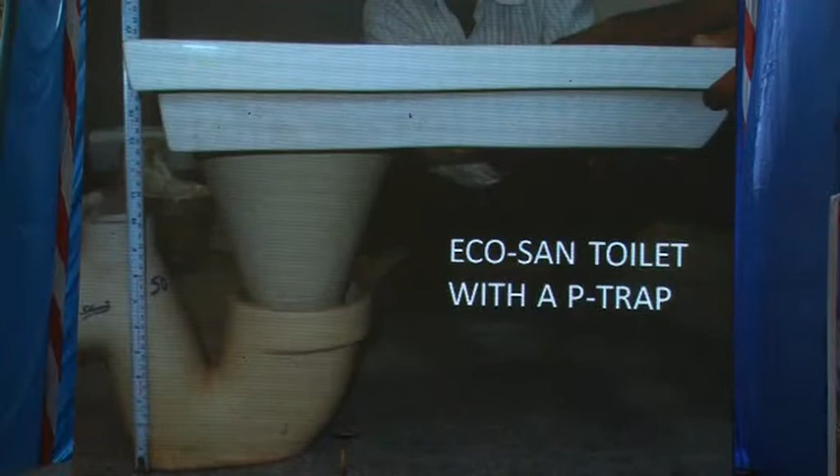And I read some of the drawings, there was no grease trap in the Pathik ashram. Okay, I'll just go. Now, I just want to tell you what is EcoSan. You can see the P trap. This is EcoSan. The front opening on the left, this is a urine orifice, this is a fecal passage. And you can see both the pipelines laid separately.

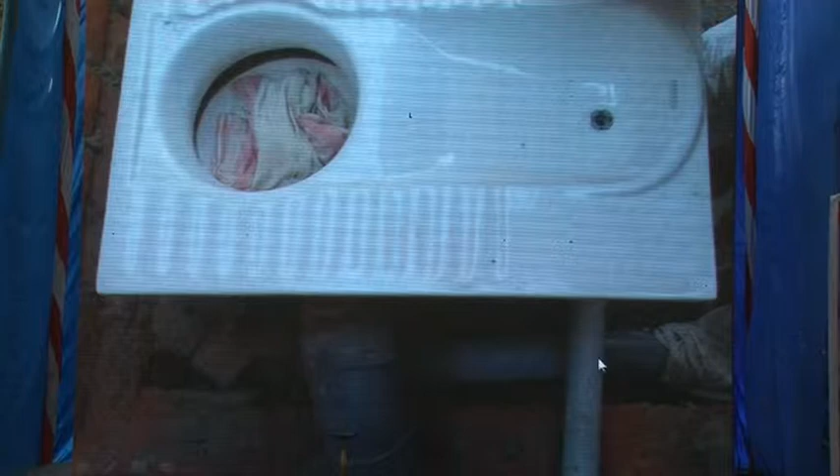Additional 5 lakhs, suppose, giving you benefits for next 35-40 years. Anyway, honestly, I'm really thankful because I don't know how to cover up all the areas. But

if you leave the excreta to the soil, you gain in energy. And if you leave it into the water, you call for advanced aeration system. And advanced aeration means not only NO2, NO3, it will produce N2O, nitrous oxide, which is 314 times more potential as a greenhouse gas.

Forget about methane, forget about carbon dioxide. Carbon dioxide is a peanut, forget about that. Your nuclear power plant, your hydro power plant will not give you CO2, and therefore no forest, and therefore no food for 10 billion. What are we proposing? Give me more carbon dioxide. I'll give you more food and we will grow plants in a manner.

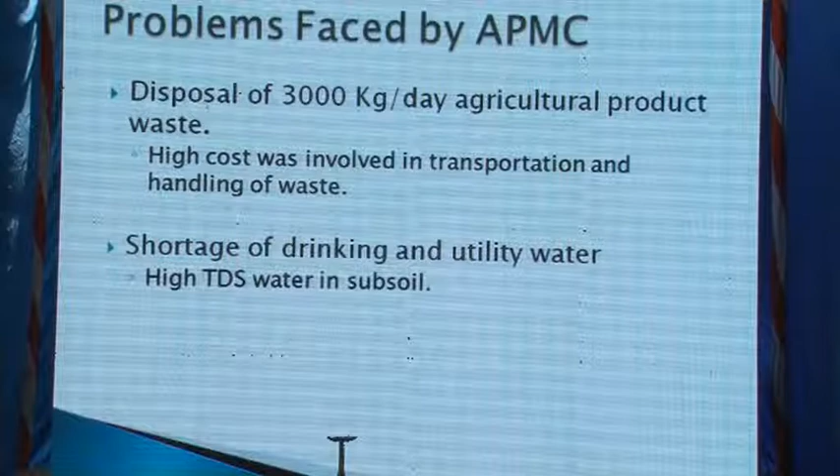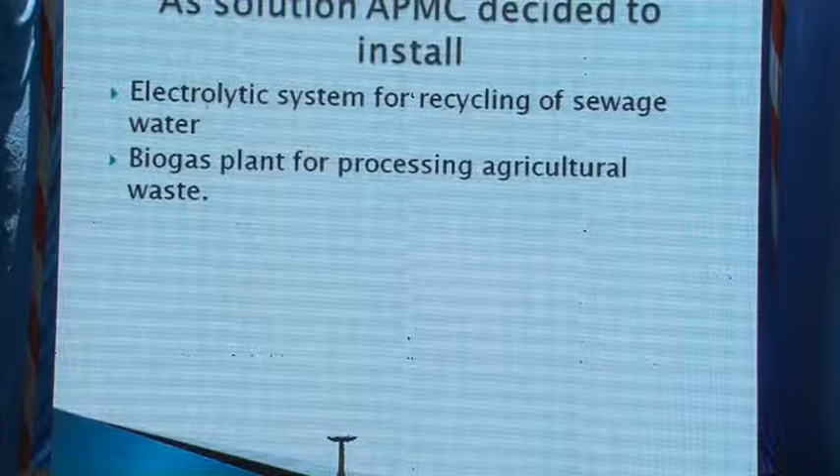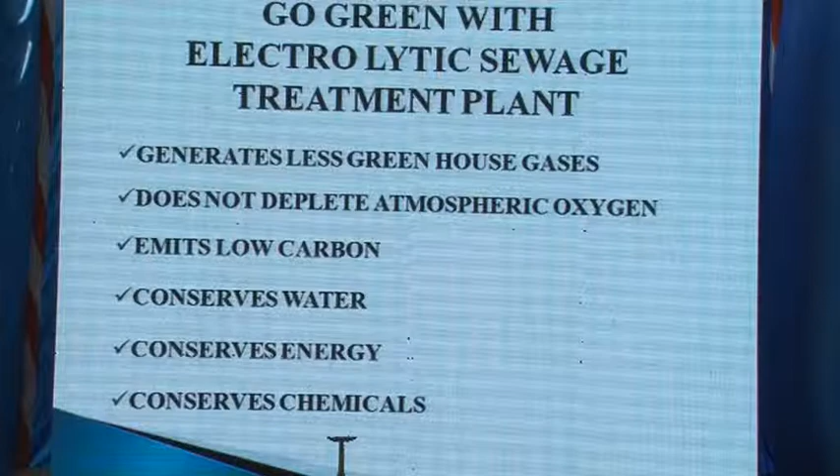As a solution, APMC decided to install an electrolytic system for recycling of sewage water and nearby a biogas plant for processing agriculture waste. Now, what is the electrolytic process? Go green with an electrolytic sewage treatment plant. First of all, it generates less greenhouse gases and does not deplete atmospheric oxygen. It emits low carbon, conserves water, conserves energy and conserves chemicals.

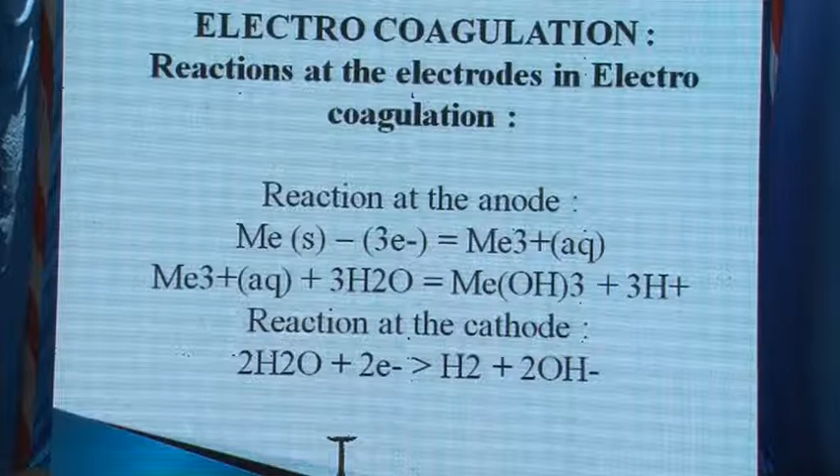The electrolytic process of sewage water treatment is totally chemical free and non-biological. It basically involves the passage of electricity through water. Electric current destabilizes dissolved and colloidal particles and alters the charge on suspended matter, permitting electrocoagulation, agglomeration, electroflotation and then removal. This is a mathematical calculation of how the electron transfer takes place. This is for the electrocoagulation calculation.

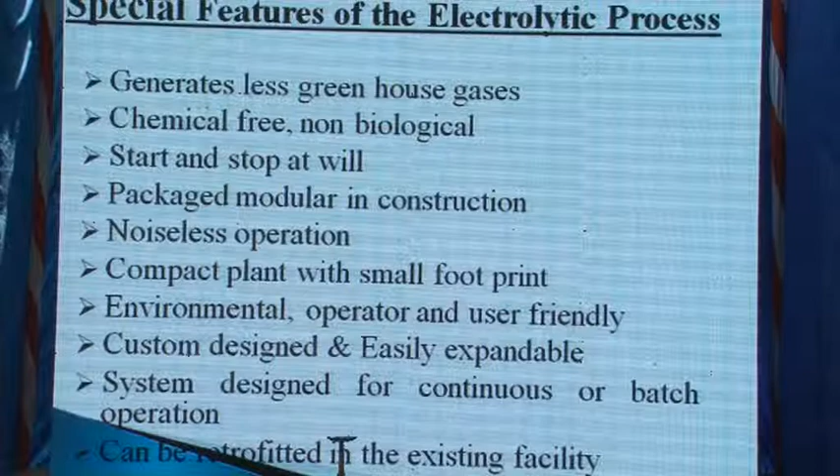Now, special features of the electrolytic process: it generates less greenhouse gases, is chemical free, non-biological. Again, it starts and stops at will. Whenever you want to start the plant, you can start. Whenever you want to stop the plant, you can stop. It's a very easy operating system. Package modular in construction also, and it's noiseless operation, no noise at all. It's a compact plant, environmental, operator and user friendly. It can be custom designed, easily expandable, system designed for continuous or batch operation also.

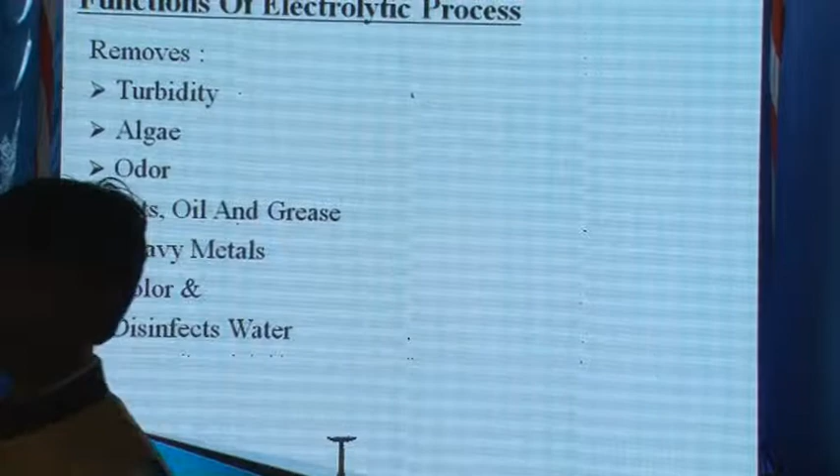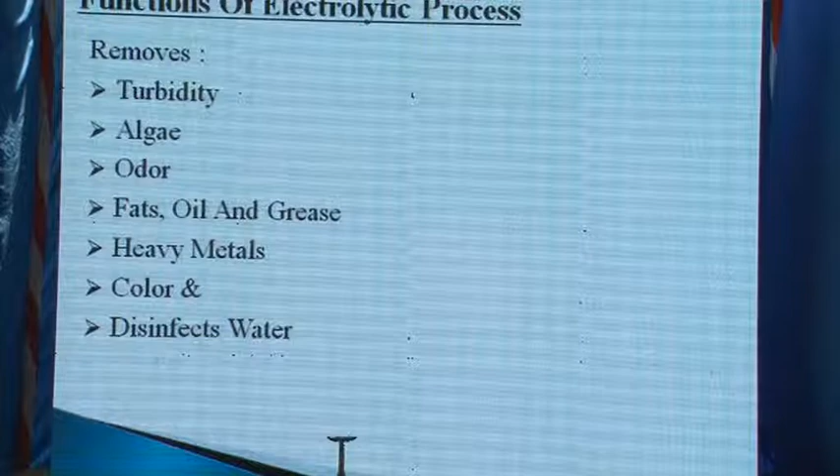How does it function? It removes turbidity from water, algae, odor, fats, oil and grease, heavy metals, color and disinfects water. Applications of this technology could be for raw water from sewage, used water from swimming pools, sewage water, cooling towers, effluent also.

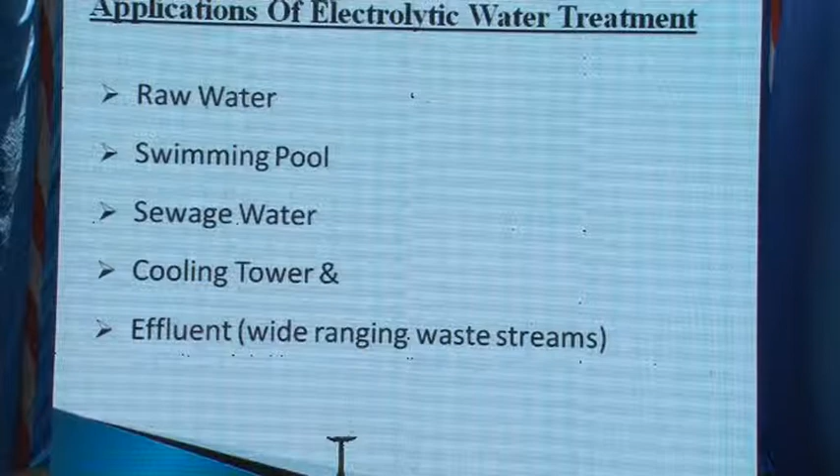Now advantages of this technology: no aeration, no blowers, no diffuser, no noise, no chemicals, no need to maintain MLSS, pH, temperature. Does not deplete oxygen, environment friendly, operator friendly, no skill required, accelerated startup, start and stop at will, modular construction, compact, small footprint.

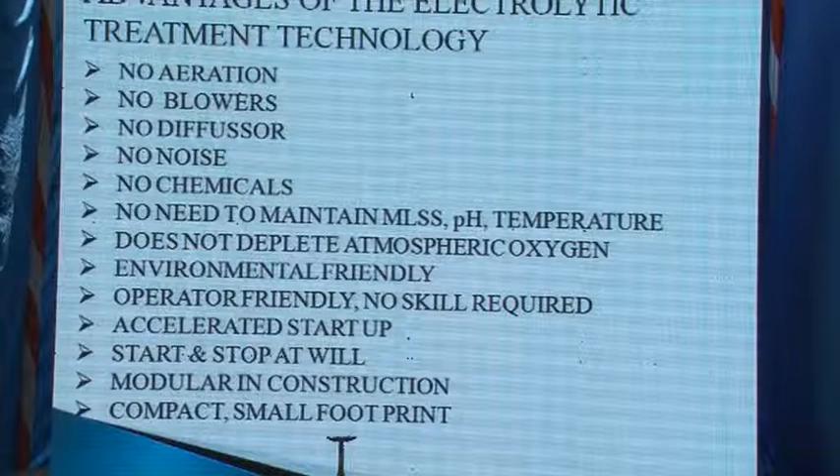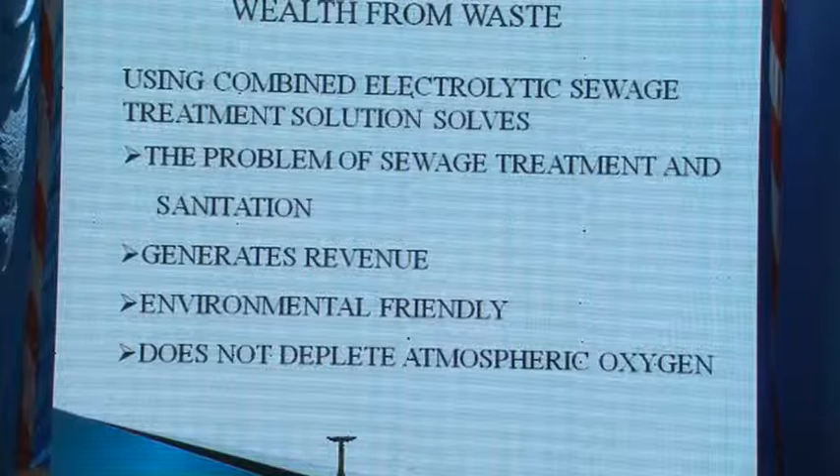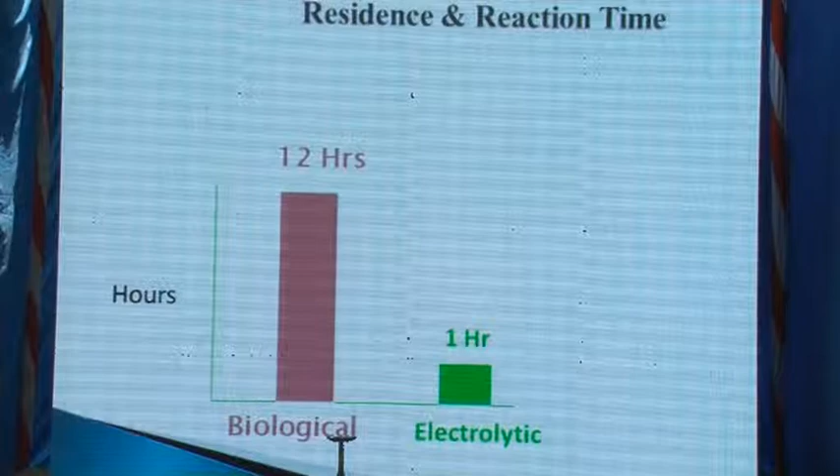Now this is the difference. In the biological process, it will take minimum 12 hours to activate. In the electrolytic process, within 1 hour you will get the result. For the final product in the biological process, it may take 1 month. The electrolytic process will get the result within 1 hour.

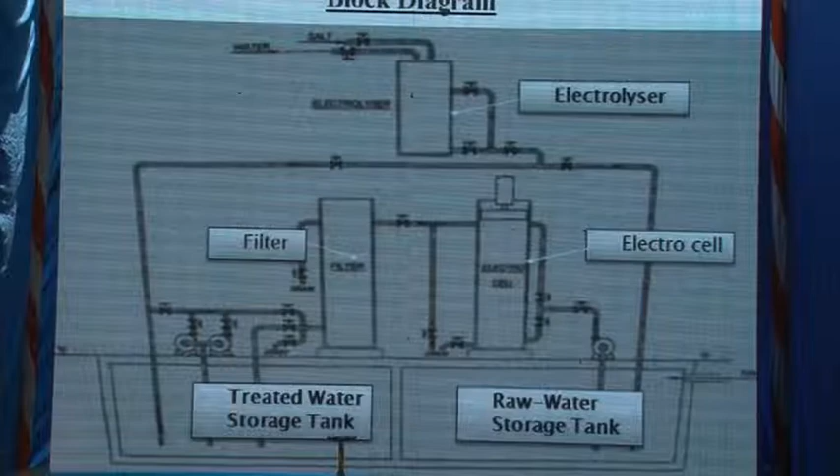This is a block diagram. First a raw water storage tank, then electro cell, electrolyzer, filter, and then treated water storage.

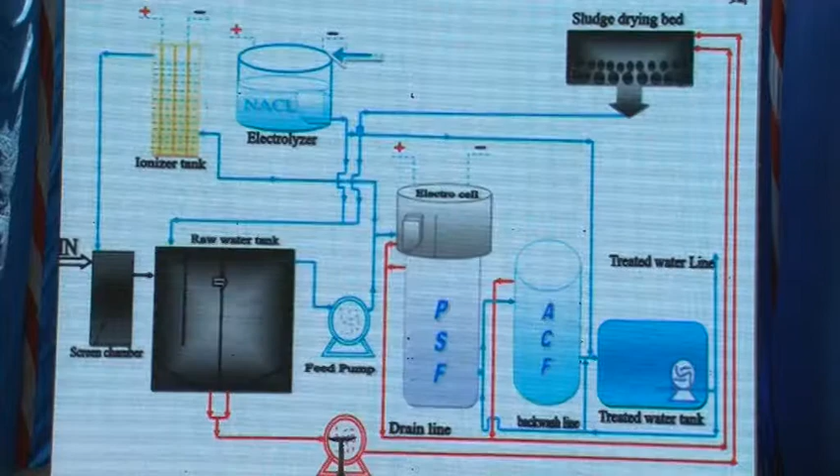Now, coming to the particular case study of APMC Vadodara, which we have already worked on and it has been running for the last 3 years. We have installed a plant capacity for this electrolytic water process of 75 KL per day, 75,000 liters per day. It's the total capacity of the plant. Of course, right now we are running at 30,000 liters per day.

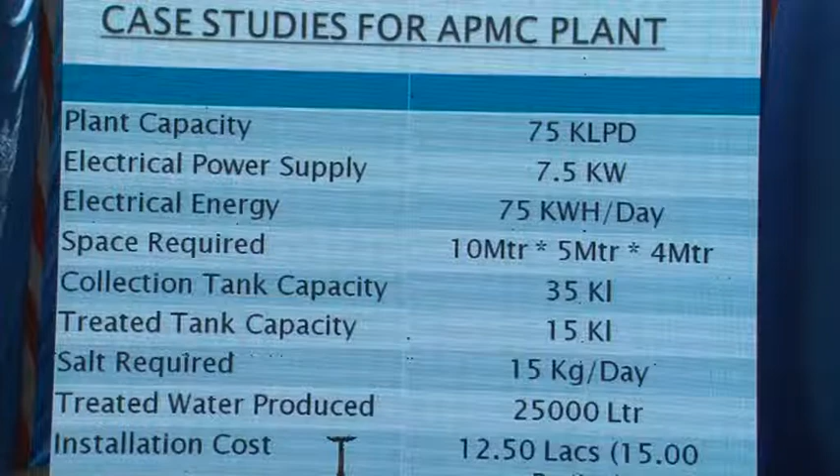Now the operating cost for 1,000 liters. Electric consumption at the cost of 5.5 rupees is only 3.85. And we are not getting any electricity from outside, from GEB. That I will show you later on.

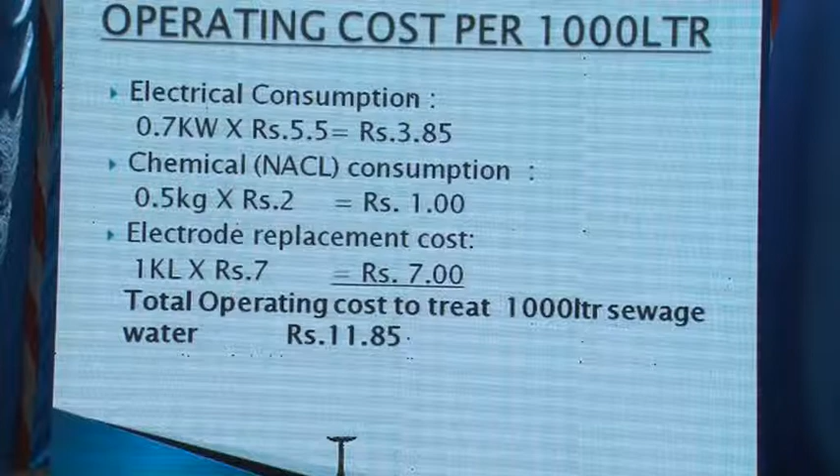Chemical, only salt we require, that is 2 rupees per kg, that costs 1 rupee. Electrode replacement costs 7 rupees. So in total it comes to 11 rupees 85 paise per 1,000 liters of sewage water.

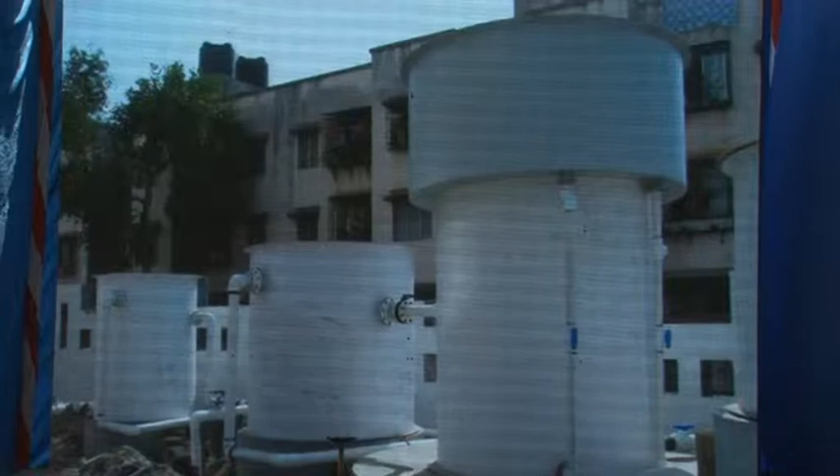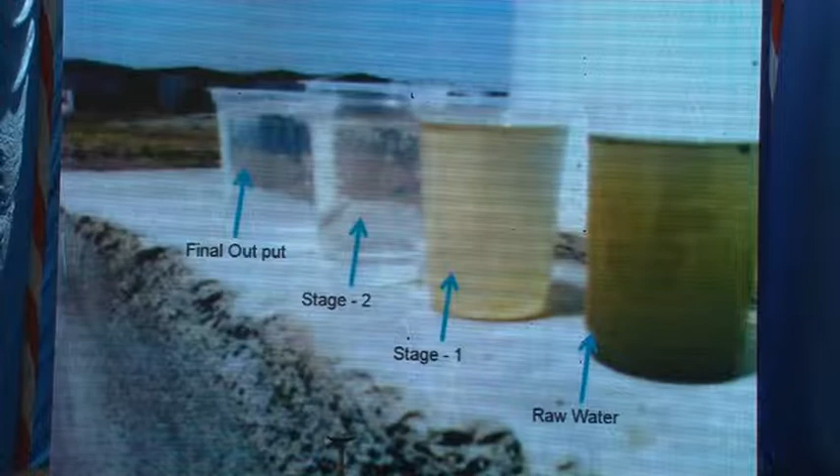These are some photographs of the plant installed there. The model is already displayed just nearby. These are also real photographs. Now see, the raw water we received from sewage, then after stage 1, stage 2 and finally the output water we received. See the difference between the first and third one. This is a real photo of the APMC STP plant.

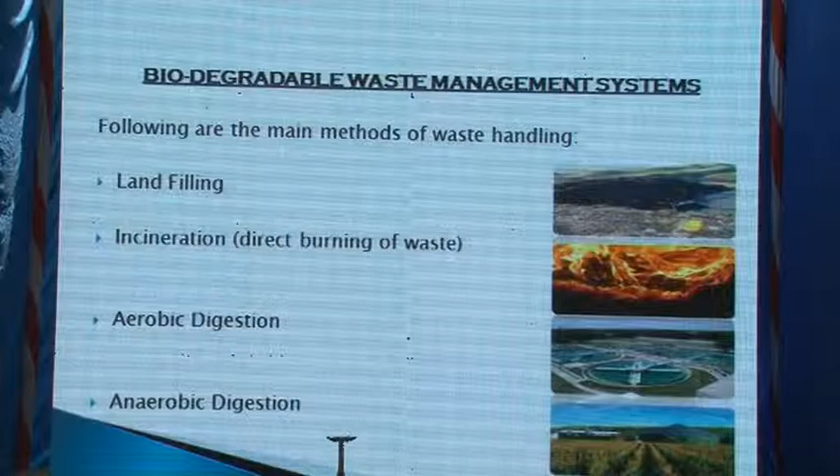Now nearby we have already installed a biodegradable waste management system also. Generally the processes for biodegradable waste are landfilling, incineration, aerobic digestion, anaerobic digestion, right? But there are advantages and disadvantages in all the processes. Say landfilling: we require land, it is not suitable for recyclables, it disturbs the surrounding environment, expensive transportation, and so on.

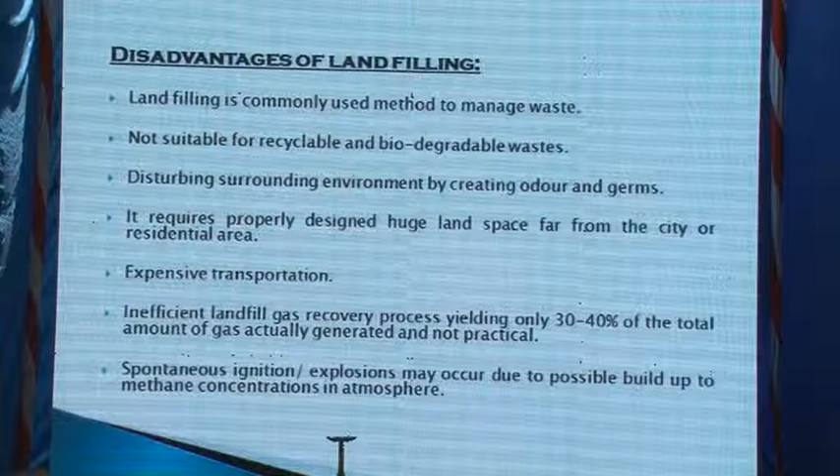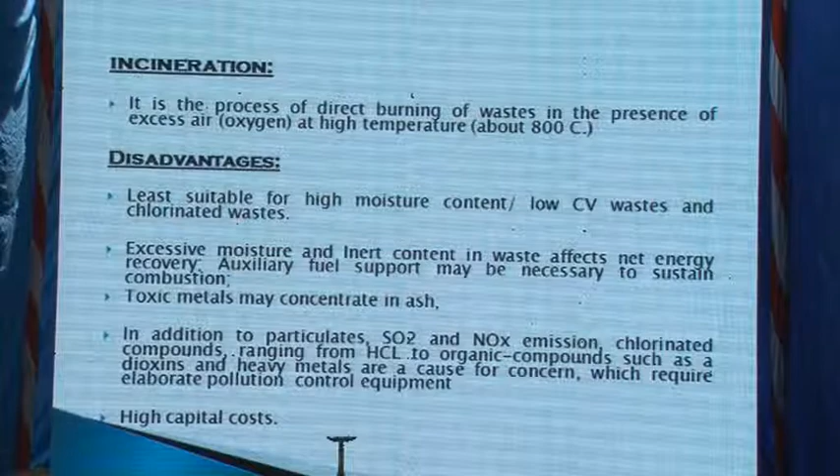Incineration is a process of direct burning of waste in the presence of excess air. It is least suitable for high moisture content, in addition to particulates, SO2, NOx emissions, and chlorinated compounds, which require elaborate pollution control equipment, with high capital cost.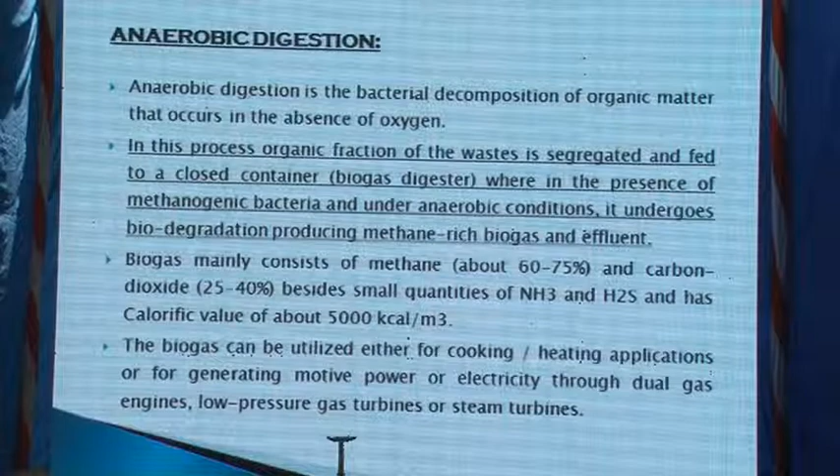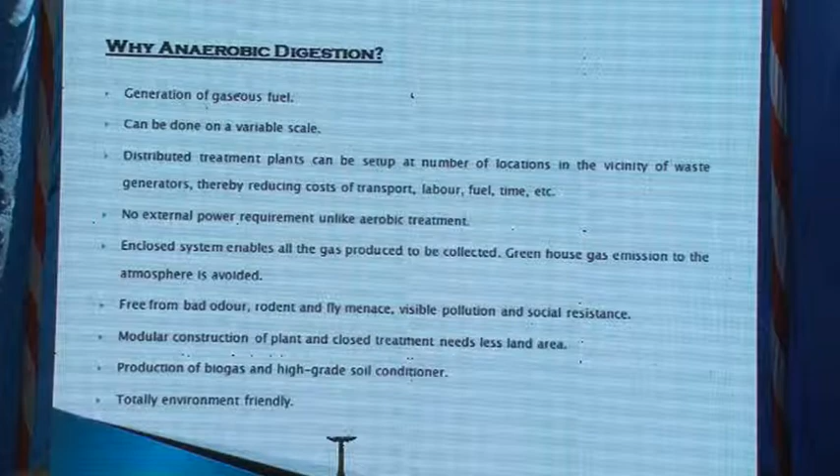Biogas can be utilized for cooking, heating applications, or for generating motive power or electricity through dual gas engines. Here we are generating electricity from this biogas plant, and how we are using that electricity I will show you. This is why the anaerobic digestion system is adopted here. Is it totally environmentally friendly?

This technology can be adopted for disposal of biodegradable waste from different sectors like residential, commercial, industry as well as industrial complexes. This has been proved most economical and eco-friendly.

See, these are the zero waste campus products. Rotten vegetables and fruits are collected from within this APMC campus. It is almost 3000 kg per day, and then it goes to the zero waste campus process. This is for general.